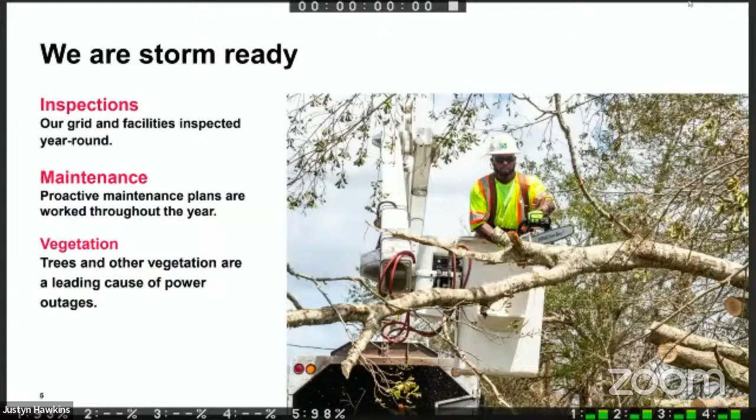Our programs are here to ensure that we're ready to respond to our customers. For example, our 100% lateral and feeder program touches our feeders in a cycle of over 8 years, wherein we touch all of our feeders in our system, from tip to tail. And we've been seeing great benefit in that.

As far as the performance of our circuits that have been through that program thus far in our 8-year cycle, we're seeing 30 to 40% improvement in our service unavailability, which is our SU when our feeders go out, as well as our frequency.

The other thing we have is the focus program. So if we see things that are unique to a circuit, wherein we can pinpoint the actual cause of an event, we can dive in and fix that specific thing through data and understanding what our facilities need through trending analysis.

Another program I'd like to mention, we're doing some work on our CBD. We're doing replacements on certain types of transformers where we see that when they were made and how they were made, they're not to the modern standard. So we're doing some replacements proactively as well.

We also have a maintenance program that's purely driven by data analytics and understanding what things, like for example in our substations, what assets we need to touch and renew over time.

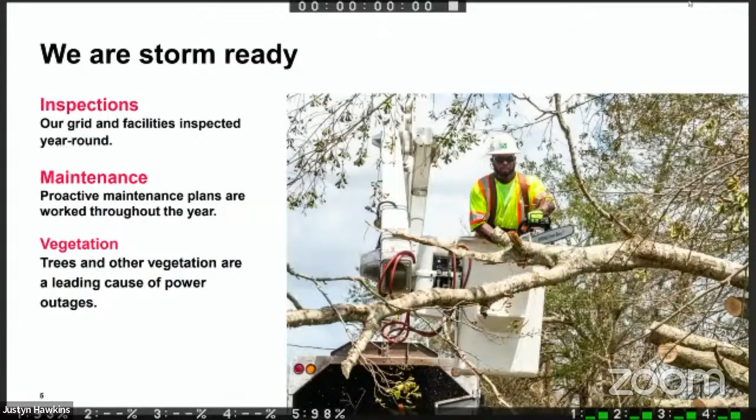And then of course, vegetation is one of our leading causes of outages. We make sure that we have our trim cycle, which is 18 months to 2 years. We go through that cycle where we inspect and understand what we need to go after to get rid of those hot spots throughout our system. We also do hotspot trimming where we find points of potential failure in our vegetation management system that we address as well.

In addition to the programs I discussed, we are doing tons of monitoring of our weather patterns. It's a 24/7 operation for us, 365. We look at our weather forecasts as well as computerized models to understand the devastation if we did have a storm pop up on us.

We understand sometimes we don't have as long of a time when these weather systems develop. Sometimes they pop up in the Gulf and they're upon us rather quickly. So we make sure that we train and drill.

We are an industry leader in storm restoration. Through EEI, over the last 25 years, we have over 44 awards in storm restoration. We're proud of that, but there's always room for improvement and we recognize that.

So restoration, I like to describe it when people ask me, what is restoration? How do you do it? To me, it's kind of like a ballet. There's a lot of different aspects to it.

First, when the storm passes, and even before the storm, we have a lot of pre-planning where we do a lot of assessments. And as the storm passes, we come in and report those things up and roll those up to understand the level of devastation that we have.

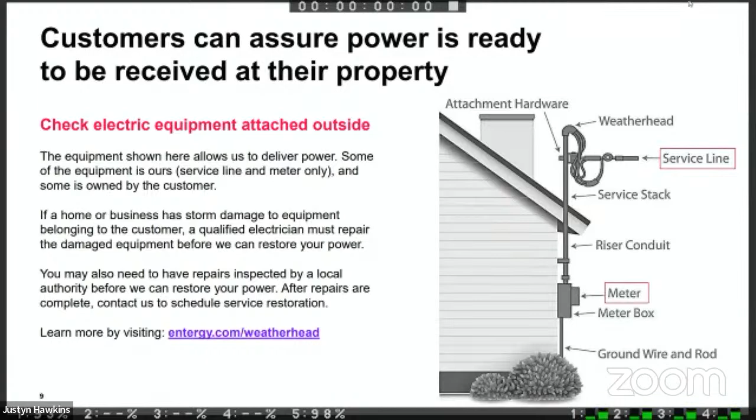I get asked quite often by customers what they can do to ensure that when we are restoring power, they're good to go so we can connect them back to our system. Here you can see a diagram of a weatherhead on a house. We had a tornado restoration a few years ago right in the middle of the city, and the weatherhead of one of the houses was torn off. These are the things you need to look for. If you look outside your house after a storm and see that your meter can or weatherhead is torn off, you need to get an electrician so while we're still there, we can connect you on an emergency basis so you can get power as soon as possible. That's one important thing people tend to overlook after a major weather event.

The most important thing for me, and what I tell all the folks that work for me across the state, is that if anyone gets hurt during a restoration event, we're not successful. I understand the public loves our linemen and loves to watch what they do - they provide a major service to the city. But please step back, observe them from afar, and don't step into their work zones. Let them focus on what they need to do to restore power as quickly and safely as possible.

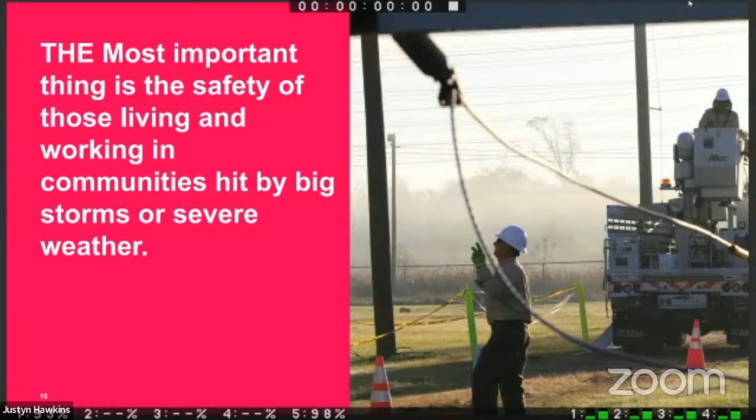So I'll pass it over to Sandra Miller to talk a little bit more about the customer service aspect.

Good afternoon, council members. I want to talk about what we're speaking with customers about in the community. We're hosting community meetings around the council districts and attending numerous neighborhood association meetings, speaking directly with customers about concerns, particularly hurricane preparedness. We've hosted a meeting with our managed account customers, some of our larger commercial customers, about hurricane preparedness. We're also posting on social media and working with local media to make sure the public understands our hurricane preparedness and how to get in contact with us.

One thing we're talking with customers about is how they can be prepared. We're prepared, but customers need to be prepared as well. We talk to them about preparing an emergency kit. It's important to recognize that severe weather events are coming through faster and more frequently, and may not necessarily be related to a hurricane - other parts of our service territory have been impacted by severe storms. So we're encouraging customers to keep that emergency kit available at all times, and pay attention to expiration dates on non-perishable goods in the kit. That's been important information customers have been pleased to hear, and we make sure we're keeping them informed about how they can best prepare themselves.

So we're talking to customers about preparing their house. They can make sure they have plywood ahead of time if a hurricane is approaching, and have hurricane shutters available on their homes. One important thing is trimming back trees and shrubbery that may impact their home should an event occur, cleaning out gutters and drain pipes, and making sure they're securing outdoor furniture, even garbage cans, which can become a missile during a severe weather event.

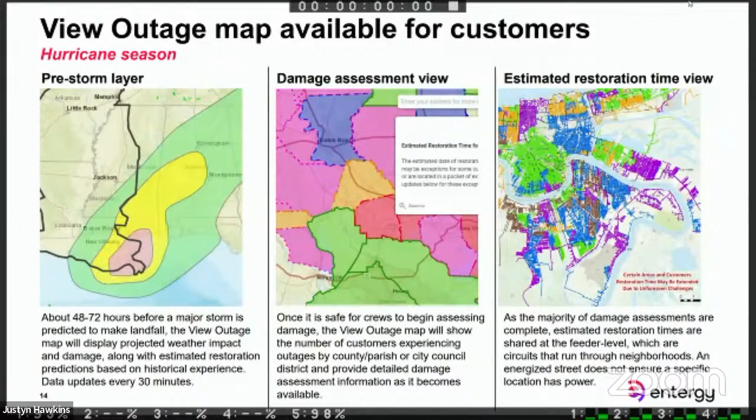Finally, we're talking with customers about ways they can stay in touch with us. If there's an outage, we know there's a large number of people out, but we want to make sure they are signing up and downloading our mobile app to report outages. They're texting us and signing up for communications, and they can text us for an outage by texting 368374 to report the outage, and then they can text STAT to get status updates along the way. They can also report an outage through myEntergy or call us directly.

But these are some of the things we're talking with customers about around the city, and we just want to make sure you all know the efforts we're putting in place in that regard. So that brings us to a close for our hurricane presentation. We do have some information about a verification process, but we'll pause here, and if you have any questions regarding our hurricane presentation, we'll take them now.

I have some questions for Mr. Benya. First of all, thank you guys. I've seen a lot of customer service reports before, but I don't know that I've seen a more comprehensive system reliability report. It invokes some questions to me about institutional knowledge versus the system versus weather patterns. I wrote down weather patterns versus weather events when you were talking.

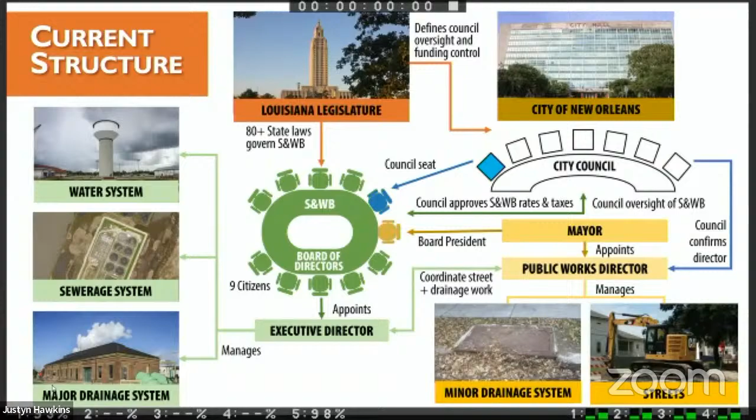On the other hand, it has some features of a municipal utility. The board is actually led by the mayor and includes a city council member. The city council, as previously mentioned, controls the utility's rates and taxes and must coordinate with the city on street and drainage processes. Our conclusion is that this hybrid approach does not serve us well and is directly responsible for many of the problems we see in our daily lives in New Orleans.

I'd like to run through a few of those problems. First is the risk to the financial sustainability of critical infrastructure.

As we mentioned, the council holds the authority to impose Sewerage and Water Board rates and taxes, but is not responsible for the Sewerage and Water Board's performance. What we've seen is that politics historically has entered into the council's funding decisions, which has contributed to historic underfunding and the poor state of today's infrastructure. It's also shifted the costs of the system to current and future ratepayers.

We also note that the city council has some oversight of the Sewerage and Water Board, but it lacks clear mechanisms to fully carry out this function. What ends up happening is that the council uses funding, the one card it does have to play, as leverage to hold the utility accountable.

Instead, what would be more constructive is having the focus of oversight being on working together with the Sewerage and Water Board toward the public good.

There's also another concern of ours: the poor performance of the drainage system. As you know, the city handles the minor drainage system through the Department of Public Works, and the Sewerage and Water Board handles the major parts of the drainage system.

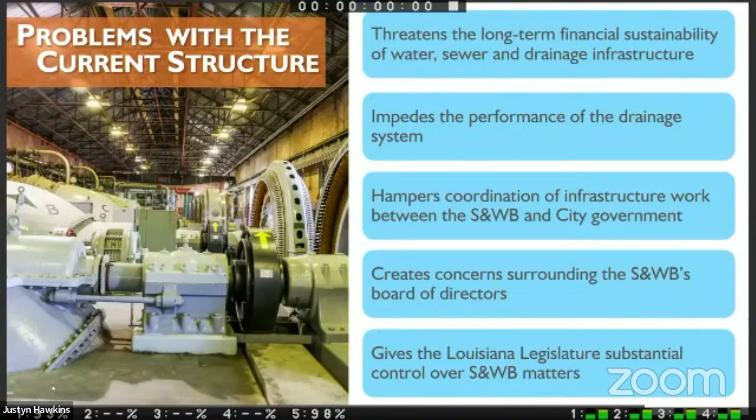And most significantly is our concern about the legislature's substantial control over local utility matters. It is impossible to address most of the Sewerage and Water Board's problems without driving to Baton Rouge. This gives lawmakers with little or no connection to New Orleans broad authority to decide matters of local interest.

BGR recognizes that pursuing governance reform will take a significant effort for you as a leader. So why should you do it? Because it will create a stronger framework for current and future leaders facing 50 years of system rebuilding ahead. It will also lay the foundation for greater reliability and efficiency for the public, and help build public trust among current and future generations of ratepayers and taxpayers.

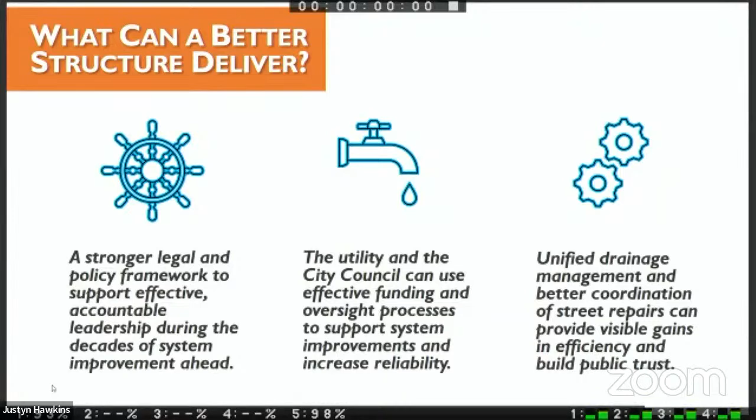So our report's main recommendation is that the mayor, as the leader of the city's administration and the president of the Sewerage and Water Board, take the lead on this issue and further study the two governance reform options that we came up with. We encourage the mayor to select a path forward, and we think the mayor should do this in close coordination with the city council and the Sewerage and Water Board, and go to great lengths to include public input in this very important decision.

So we see two main paths. The first path would keep but improve the Sewerage and Water Board as a standalone utility that operates separate from city government. We think that targeted reforms could really help improve the current status of the Sewerage and Water Board.

One example is rebalancing the mayor's power on the board by having the president pro tem, who is a citizen member of the board elected by the full board, lead the utility's public meetings and let the board make committee assignments. We also think it would be wise to take advantage of an existing law to have a civil engineer fill the city council's seat on the board, to remove that conflict of interest we talked about earlier. We also think it would be smart to build a communications council to bring together DPW and the Sewerage and Water Board on street repairs.

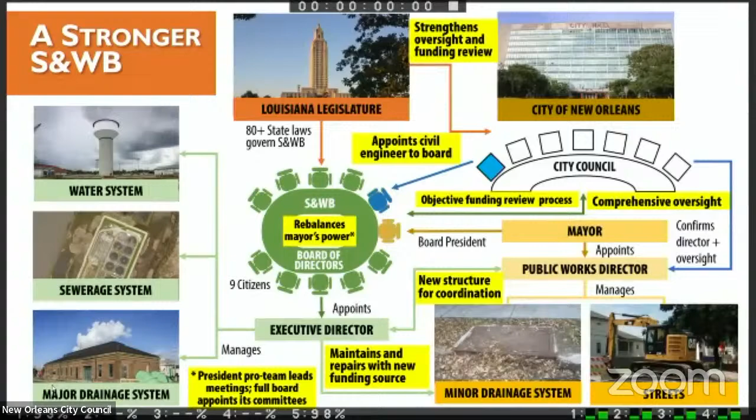The other path would replace the Sewerage and Water Board with a municipal utility. This would be the more difficult path, but could substantially address all of the problems that we identified in our report. The big question there is the overall readiness of city government to assume the functions and responsibilities of the Sewerage and Water Board. So where do we go from here?

Each of the major players in the current structure—the city administration, the city council, the Sewerage and Water Board, and the legislature—can take some steps now toward governance improvement.

Let's start with the administration. We acknowledge that the city has been working with the Sewerage and Water Board and the council to study the transfer of drainage responsibility to the Sewerage and Water Board. While it has issued an initial report, it should continue to pursue this issue.

It should also continue its efforts to better coordinate with the Sewerage and Water Board on drainage, improving drainage infrastructure repair processes.

Meanwhile, the City Council, as you know, has been taking steps to increase its oversight of the Sewerage and Water Board and study the transfer of drainage responsibilities to the Sewerage and Water Board.

And finally, the Sewerage and Water Board has been working with the city administration and the City Council to study the transfer of drainage responsibility. We believe it should continue to pursue that issue and continue to pursue coordination with the city.